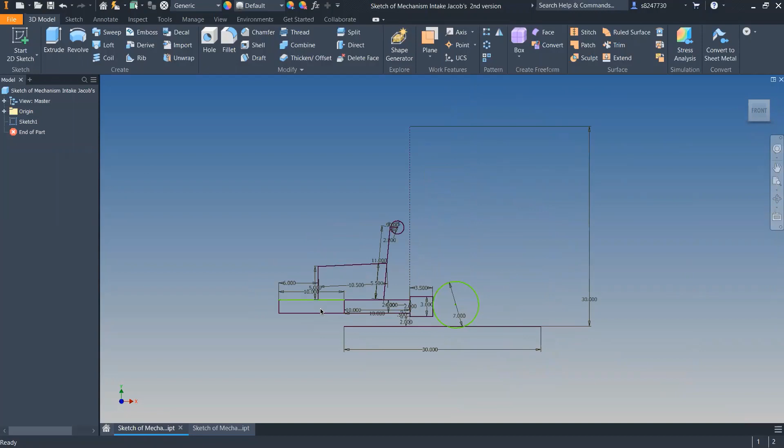So the thing that we left off on was we were creating a sketch that models the intake, and Jacob edited the sketch that he made. So I'm going to show you the one that he made for the last YouTube video, and also the one that he made yesterday, so that you can copy that one. Sorry, Autodesk is kind of slow. This is the one from the last video, and this is the one that he made yesterday.

And the difference is that instead of having this piece be the piston, so that this can move down and up like that, instead this piece right here is the piston. So when it extends, this basically will move down. So I'm going to let you copy this, and then we'll see how the ball works in this system and constrain some stuff.

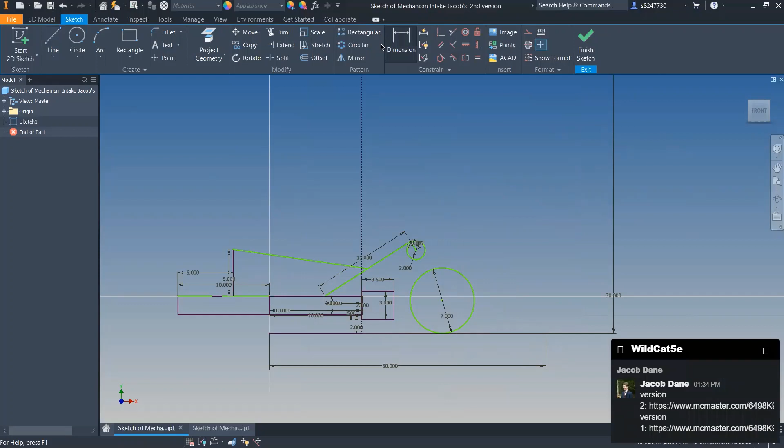So basically, this line represents the ground. As the ball comes this way, it's stopped right here. It's picked up by this wheel, because this piston will be fully extended. Then the ball will be constrained to this face, and it will also be constrained to that. So as it moves up, it will slowly come into the robot like that, under the intake, and then it'll be inverted.

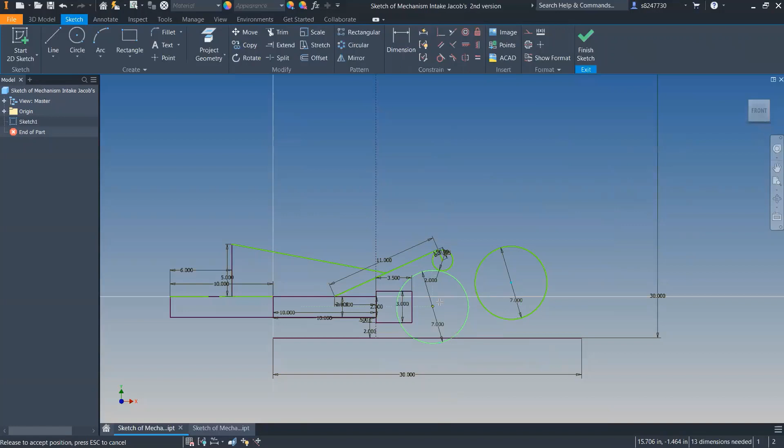You don't have to do that, but that's showing what's going to happen. And this is just a piece of frame, and so is this. So this will move in and out like that. So what we have to do is find a piston on McMaster-Carr that can do this. Jacob, you already found the piston, right? Yeah, that's what I sent to you. Let's see. Okay.

Just mention which of the versions you're using. Yeah, we're going to use version 2. So download that. We're running version 1 right now, so all we're doing is this sketch right here. Oh, and when it's all the way up, it will be inside frame 2.

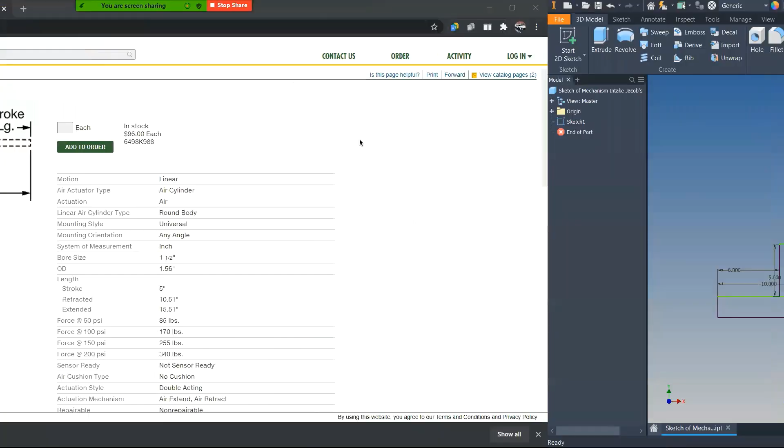So first thing we're going to do is open that thing we just downloaded. You can type in this link in McMaster-Carr, and then it'll give you this again. So try to open it from downloads, like we usually do. Be sure to click all files. I'm saving all of the files in CAD class intake.

All right, so this is good, except that, wait, let me show something. Double acting. So I have a question about this, Jacob. Don't we want it to be usually in, so that when the game starts, it's automatically in? Yeah. This is a double acting piston. Wait, but

Double acting just means that, well, single acting means only one direction. Pushing out is a force, and retracting is just taking the air pressure out. But with double acting, when it's retracting, instead of just taking the air pressure out, it also uses force to retract it. So it basically puts a force in both directions. Okay, I think I remember that.

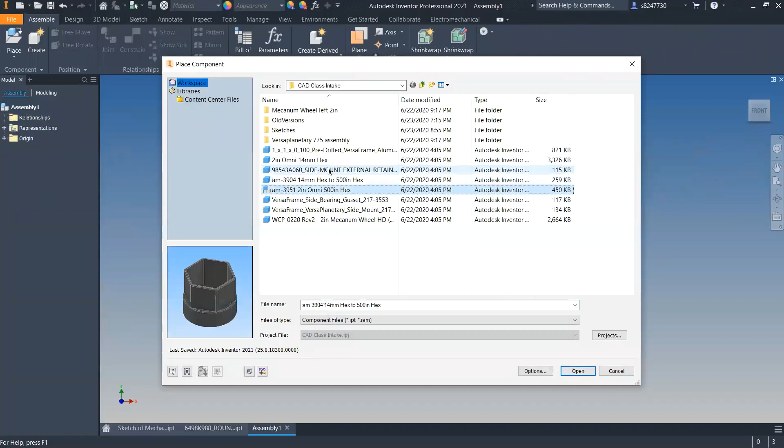That makes sense. So we want this piston to be able to move in and out in our animation. So what we're going to do is actually make an assembly, and then basically animate this piston. Sorry, I pressed saving.

All right, here we go. So we're going to ground, we're going to get 2 of these and then ground this one. Actually, only 2 of them. So now what we're going to do is go back to our files and click on this and copy and paste it.

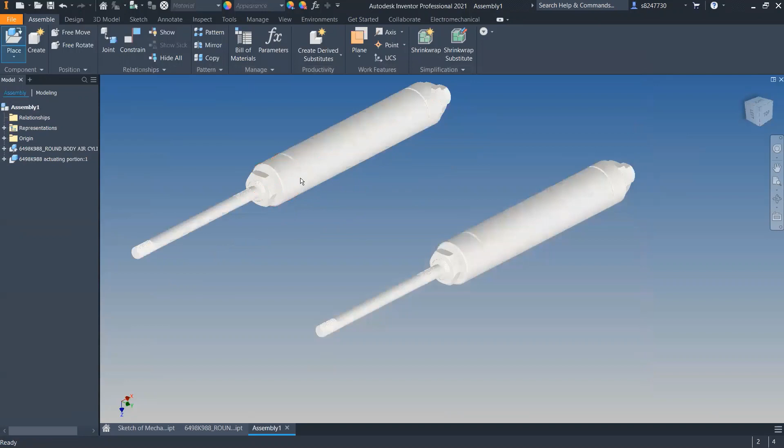We want this to be the, you can keep that product name so we don't get confused, but we want this to be the actuating portion of the piston. So now what we can do is place the actuating portion of the piston here. We're going to open it and then delete that. And all we want is the actuating portion.

Let's see. All right, there we go. Save that. So now what we're going to do is go into this one and then delete everything except for the actuating portion. Sorry, that happens. Basically just like that.

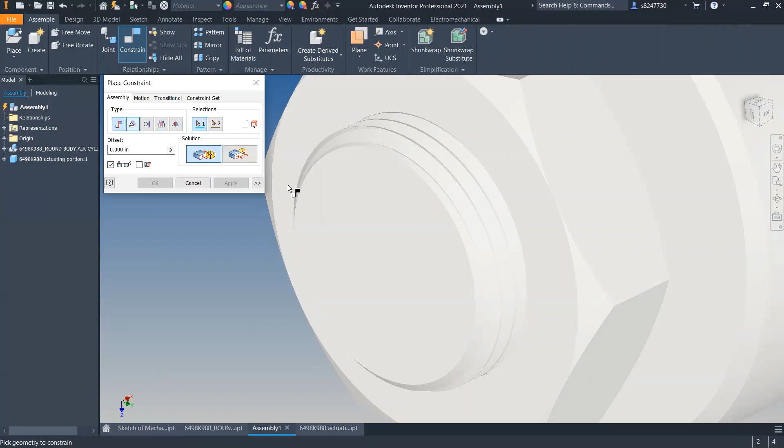Okay. And then what we can do is do a maximum minimum constraint. But first what we're going to do is do that to this. And then, so now this is going like that. So now what we can do is constrain this, and we want the maximum to be -5, and minimum to be 0. I make the minimum -5 and the maximum 0.

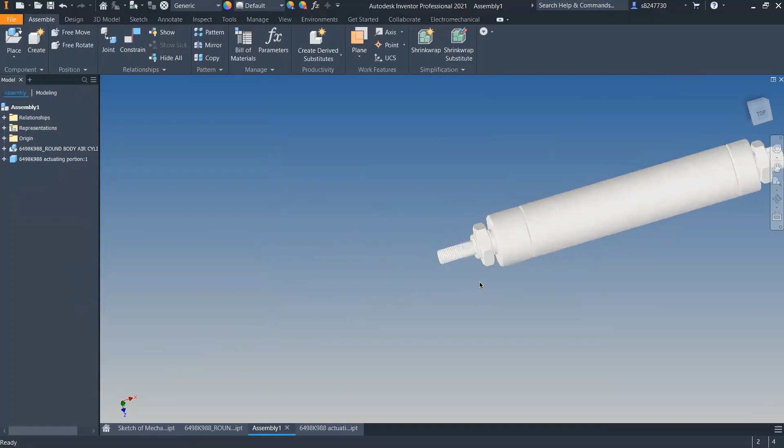There we go. So now it goes in and out like a normal piston, and I have a little animation that we can use in our actual. So this is going to be the piston. All right. So next thing we can do is start using the sketch to make the 3D orientation of this. So we're going to need some VersaFrame.

So we can go in here, and instead of having to download it again from the internet, we've already downloaded it. So what we can do is just copy this, paste this, and we can just rename this because it hasn't been put in assembly. If it was inside of an assembly, we wouldn't be allowed to rename it because the assembly would be looking for a file of that name in a folder. So you have to keep the instance of that file, but you can copy and paste it if it's in the assembly.

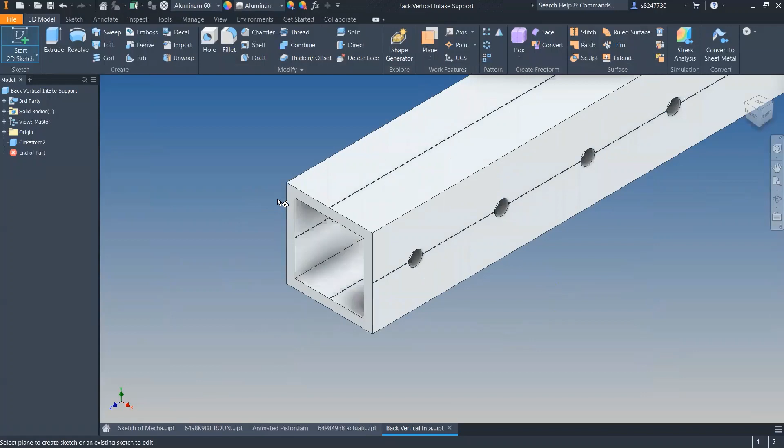So this is going to be the back intake support, vertical intake support, and we're going to have to make this piece of VersaFrame 5 inches long. So what we're going to do is start a sketch on this end, project the geometry, and then extrude it. I'm going to do a cut extrude. That's weird. Oh, sorry, I did that way too fast.

So the problem I'm having is that for some reason it's telling me to do it in millimeters. But I know that this piece is 59 inches long. So what I'm going to do is convert the document. You can go to document settings, units, length inches, apply. That way, Autodesk automatically converts the length of this from millimeters to inches. So if you measure it, it's still 59 inches long, but all of the units are in inches now because we just converted it to inches.

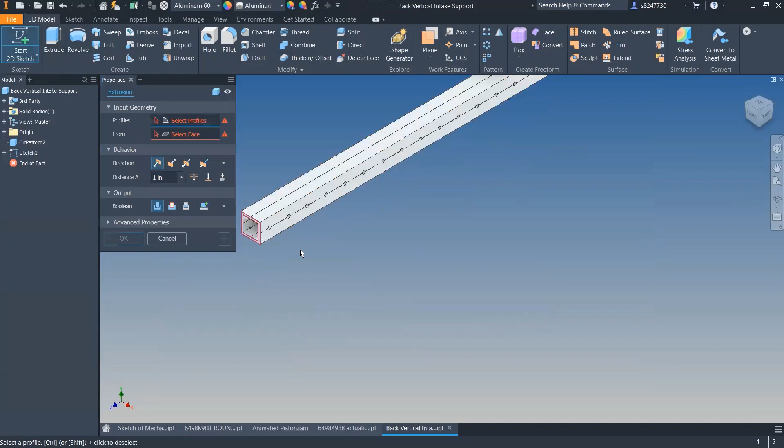So I can now extrude this 59 minus 5. Alright, there we go. Now we have our tiny piece of VersaFrame. Next thing we want to do is go ahead and close all these out, and go back to the sketch. Next thing we're going to need is an 11-inch piece of VersaFrame. So all we have to do is go to our previous piece of VersaFrame, this one, and then click.

And then we can call this the moving intake support, because this will be moved by the piston. And we want this to be 11 inches long. So all we have to do is click here.

And that's the good thing about doing the subtraction problem. I did 59 minus 5, so basically I'm putting the length that I want right here. So all I have to do is take 11 and it becomes 11 inches. That way you don't have to deal with parameters, which is something that you can look into if you want, but it makes it a little easier for us. So this base piece of VersaFrame right here is the drivetrain. So that's already done.

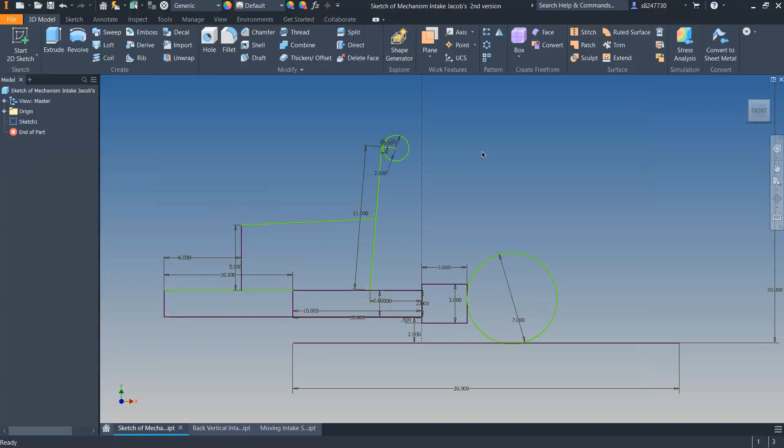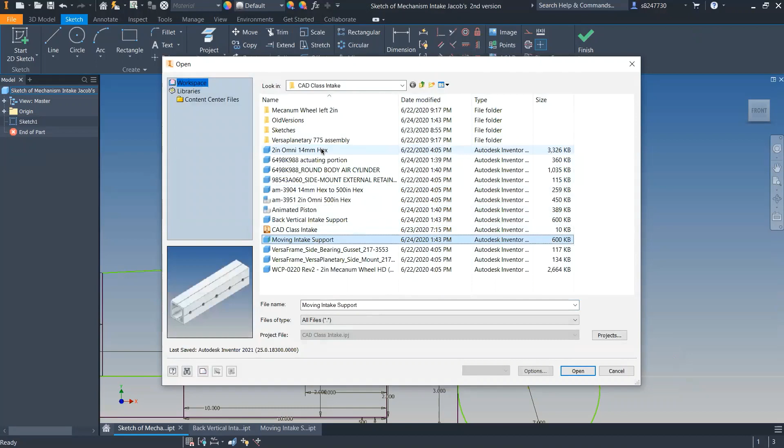And something that I realized just now is that this drawing is not really accurate. So what we're going to have to do is change this. You already know that this is 90 degrees, so we can do a parallel constraint. But we're going to have to open the little bracket that we're using to see the other offset, so that we have the right one. So this sketch, this 1.125, represents the distance from here to here.

That's good. Wrong information. 1.625. So we have to change that one too. This is the dimensions from the middle holes to that hole. Well, wait. Oh, because in your sketch, this line is the middle holes. Because it's at the bottom. That's where it would be mounted, I guess. Okay. Alright, so never mind. I was wrong. So Jacob's sketch was correct on that one.

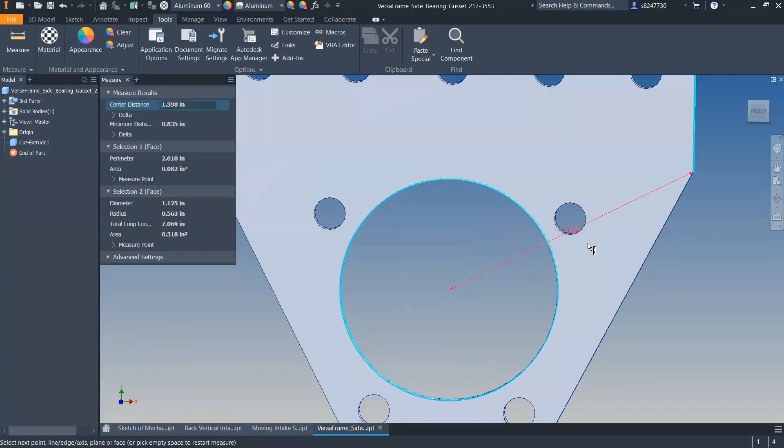On this one, we want to do 1.25. Right now, it's just measuring this distance, but we don't want that. We want the x distance. So what you can do is click delta... no, these are the Cartesian coordinates. So this is the x distance. You can see it's 1.25 along the horizontal plane. You can see that it's x because down here you have your little Cartesian plane indicator, which is x, y, and z. So this is the x-axis, 1.25.

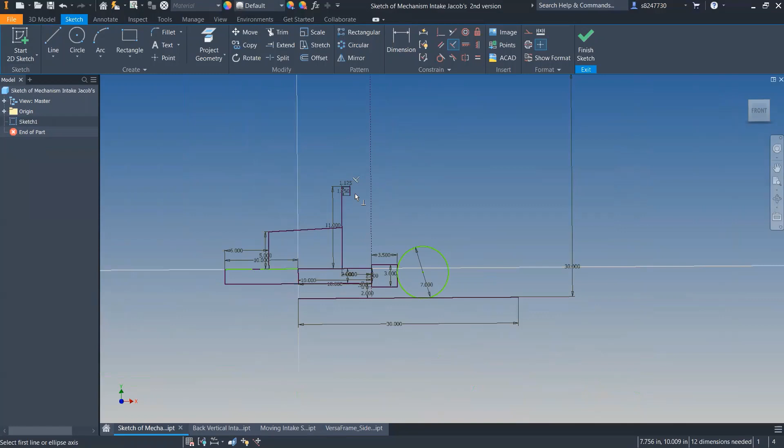Next thing, we basically just gotta put this 1.25. And instead of making this a 90-degree angle, right now we don't have an insane amount of dimensions, but if you did, you want to just use a parallel constraint. Okay, that was good. You would want to use a parallel constraint because that way people could look at your drawings easier.

I don't know why this is breaking. Okay. And this is just the same 2-inch circle. Maybe, okay. I don't know. That's weird. Anyways, so it's still 11 inches. That offset is correct. And now we have all of our Versa frame pieces. Now what we can do is start putting them all in an assembly.

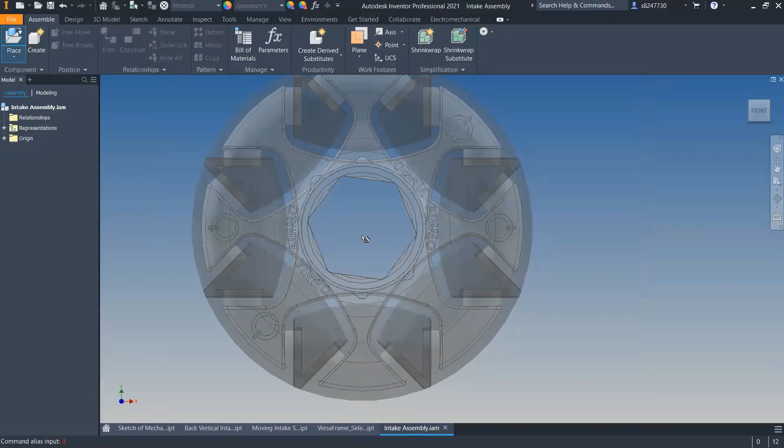Jonathan. Yeah. So I think in the sketch file when you added the offset downward, because you made the offset downward, we have to extend the overall 11-inch piece of Versa frame so that where the wheel is stays the same. So I think it has to be 12.25 inches now because you did 1.25 down, so that where the wheel was before is the same. Yeah, that makes sense. Okay. All right, cool. Thanks.

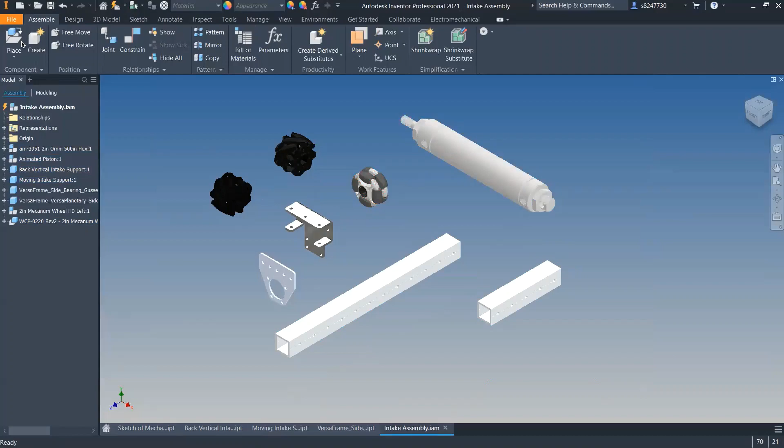All right. Next thing we're going to need to do, so we have our left mecanum wheel, but we're also going to have to put in our right mecanum, which, Jacob, did you get that? Oh, yes. That was that weird one where they were different colors. We can just change that in the assembly to make them black. Is that way? Not a good fancy black. The next thing is, let's see, the versaplanetary motor so that we can spin this.

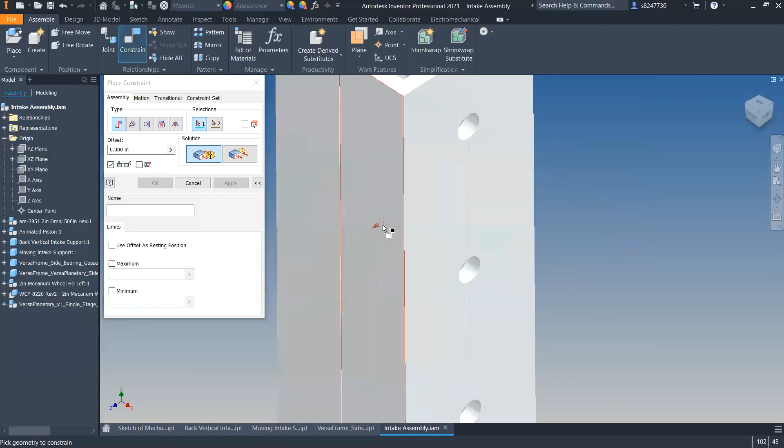So what we're going to do first is kind of orient. We're going to base everything off of this piece, which if you go back to the sketch, is this one right here. So basically, we're going to constrain this piece. Don't worry, we're going to ground something, but we also have to constrain it like that. And we actually wanted to go to this point so we can use 80-20 L brackets, which we will do in a second. We also want to constrain it to this plane. Now it can move like that, so we have to constrain it to this plane.

Now this piece is essentially grounded, but to make it so that people understand what your assembly is based off, you just want to go ahead and ground it. The reason I did that is so that if we make all these planes visible, it's oriented in these planes rather than somewhere off kind of crazy. All right. So next thing we're going to want to do is copy this, and we have to make sure that these are flush with each other in that way, and we want them to be flush in this way.

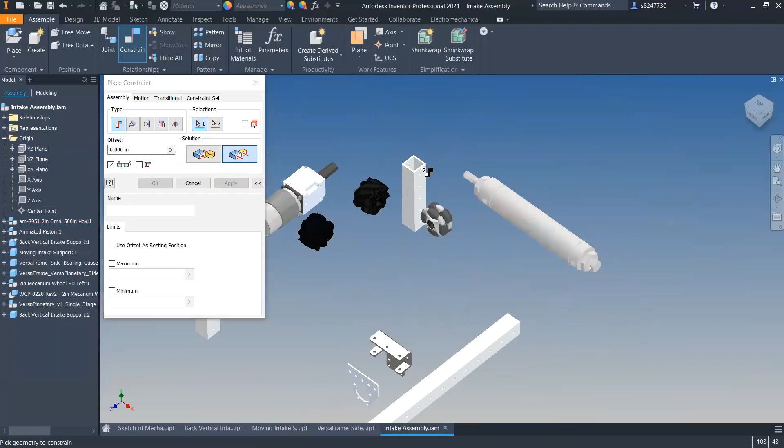Okay. So now we have to figure out the distance between the two. Luckily, we have our entire robot on CAD, so we can just reference it. But if you didn't, you would just estimate the distance, and then once the whole robot comes together, you might have to change it. So this will take a while. It's a whole robot.

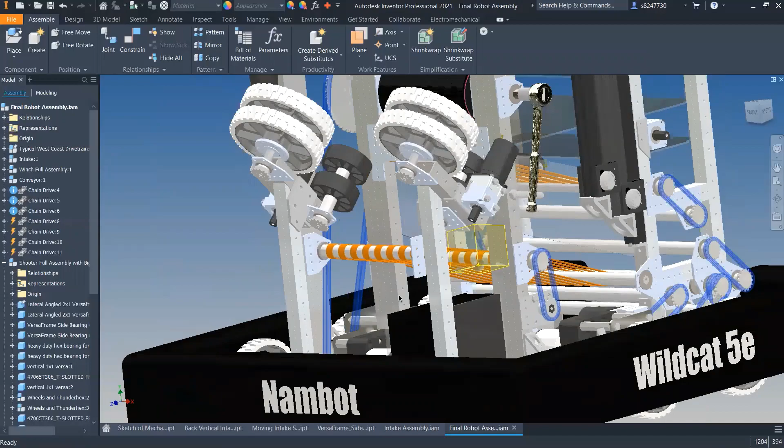Okay. So what we're doing is replacing the intake assembly, which is this one right here. So what we have to measure is the distance between this bar and this bar, which is 15 inches. So I'll move this over here. So basically that means we have to constrain this and this and make it 15. There we go. So now this piece is constrained in this plane.

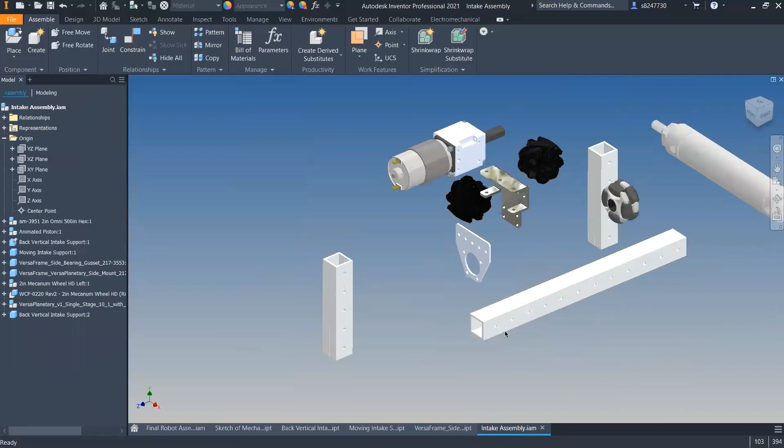Next thing we got to do is place our next piece of VersaFrame, which is this one right here. Just 10 inches long. But this one has to be able to rotate on an axis. So we're going to have to do something interesting here, which is going to be putting a shoulder bolt into the first frame. Sorry, this is kind of hard to explain.

So I'll make this assembly invisible. So don't mind these chains. Basically what we're doing is putting a bolt through right here so that our VersaFrame can rotate back and forth. And that way, once this piston actuates forward, this piece rotates on this axis. So to do that, we're going to use an 18-8 shoulder screw.

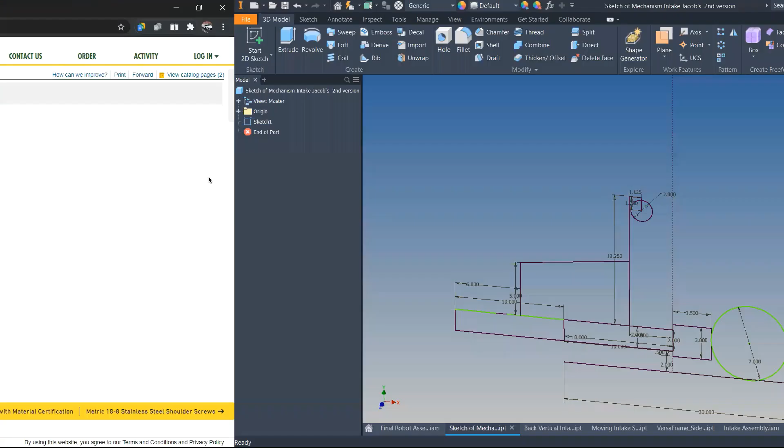So basically, what you have to remember when you're picking this out is, we'll just pick this piece of VersaFrame for example. It's a 1x1 VersaFrame. So you definitely want to have these walls in there. So the shoulder bolt has to be smaller than 0.8 inches. You also want it to be larger than about, let's say, 0.25 inches, because there could be a considerable amount of force on this bolt.

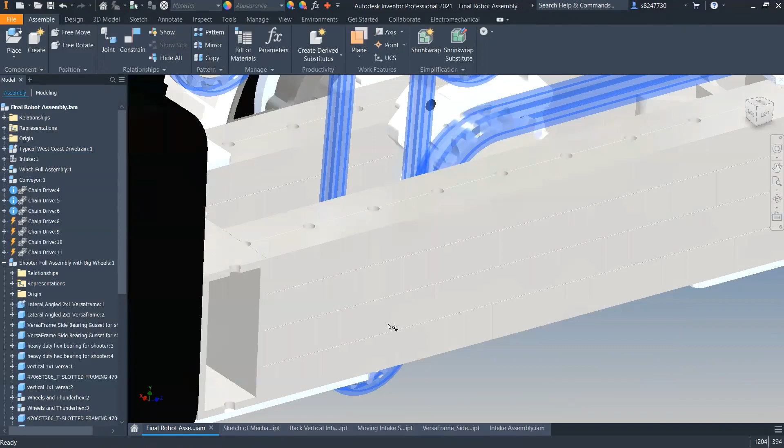Because your intake is obviously going to be hanging out of your robot. What other teams like to do is accidentally come and crash into the side of your intake, which will basically mean there's going to be a ton of force on this bolt right here, pushing it the other way, and on the piston, which is very rude. So to counteract that, we got massive shoulder bolts.

So what I'm looking at right here is the shoulder diameter. I said that I wanted it to be in between 0.8 and 0.25. So I'm going to make it a half-inch shoulder bolt, which, if you think about it, is a pretty big bolt. That's not going to break anything. This is kind of in place of a bushing or a bearing, because we don't need those things because this shoulder acts as its own bushing.

So what we can do is get a 2-inch shoulder bolt. This is the shoulder length. Go over here and save it. The next thing we're going to need is going to be a 3/8-16 lock nut, because it looks better if you have a bolt with a nut. That's how you should CAD, especially things like this.

You'd be tempted to buy a high-strength nylon insert lock nut because it sounds cool, but you should actually go ahead and buy either a medium strength or a low strength, because we only use our robots for a few hours in total. It's not like a super long robot that you've used for years and years. Just buying a low strength steel lock nut is fine, and they're never going to break for what we're doing.

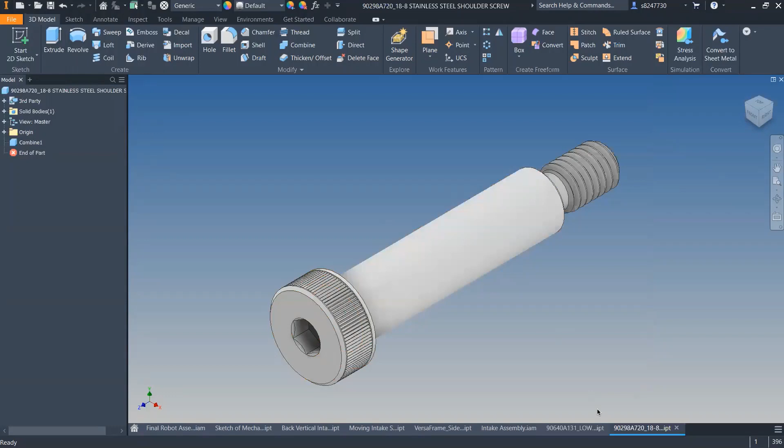Right. So save that, and save as. Oh, that's right. My computer's automatically set up to a project file, so it's saved automatically, but you will have to save it to the folder that you're saving. So basically, we can go back in here, and we want to open. We have our huge shoulder bolt and our nylon screw, nylon lock nut.

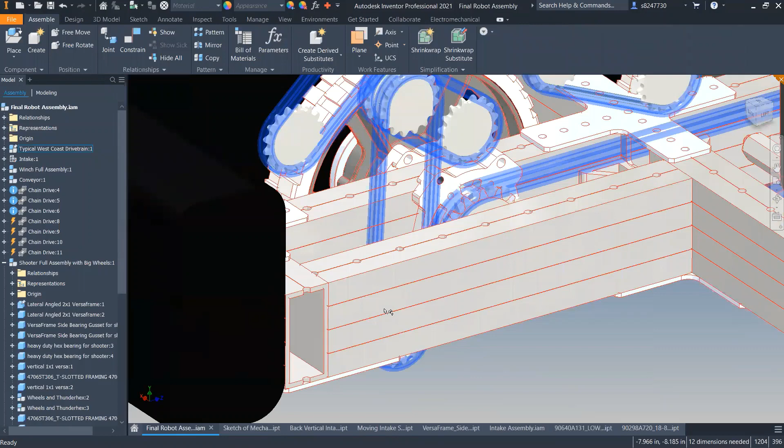Okay. So now what we can do is go back to here, and we know that this piece is actually not going to be that long. We have to extend it yet again, because this piece has to stick below this, because in your robot, you want the shoulder bolt to be in the middle of this piece of VersaFrame, so it has strength on both sides. So for that, we're going to need to extend it an inch. So instead of 12.25, it would be 13.25.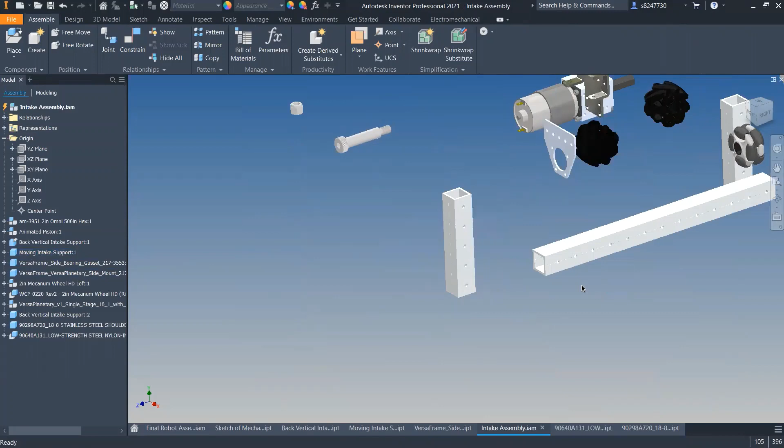So here we go. Next thing we're going to do is go back to our assembly and start constraining this. We want this face to be constrained to this face, so you don't have to drill a new hole. You can just use one of these existing holes and widen it out.

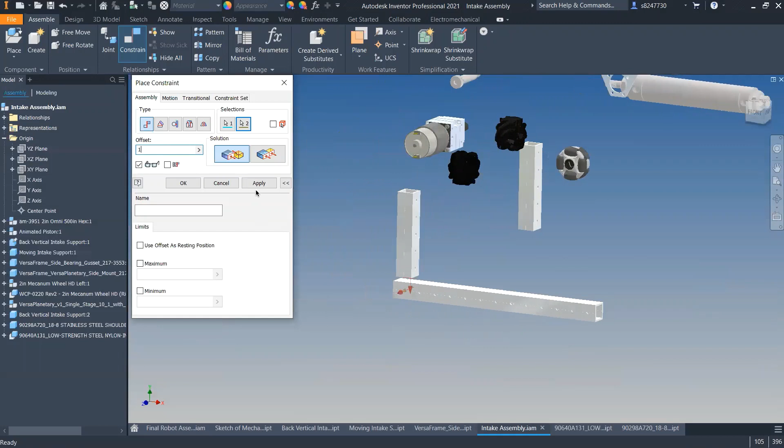So next thing we're going to want to do is do some fancy constraining. The thing that we care about is this hole, because we're going to use that for a bolt. So if we go from here to here, we know that there's a 2-inch piece of VersaFrame below this on the drivetrain. So right now, it's taking the center of this hole to this face. So we want it to be an offset of 1 inch. That way, it'll be able to go like that.

Next thing we have to do is constrain this to this. Okay. So basically, we want to have this rotating like that. And for this, I think we're going to use an axis that should align with our sketch. An axis is basically the exact same thing as a plane, except it just goes through a hole. So our axis is right there.

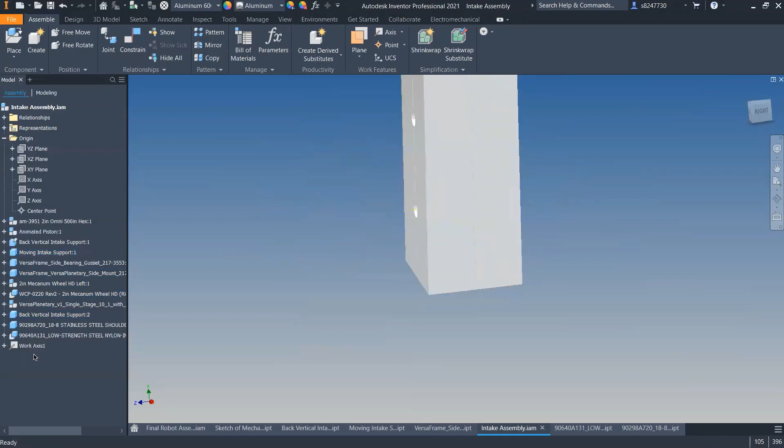So if you want to make it longer, you just have to very carefully click on this dot. It's very hard. Okay, does not want to go. So what we're going to do is go back over here. We know that if we go into this sketch and extend this line 1 inch, and make this line parallel to this line, make this angular dimension 1 inch. Note that this is basically the center of the hole.

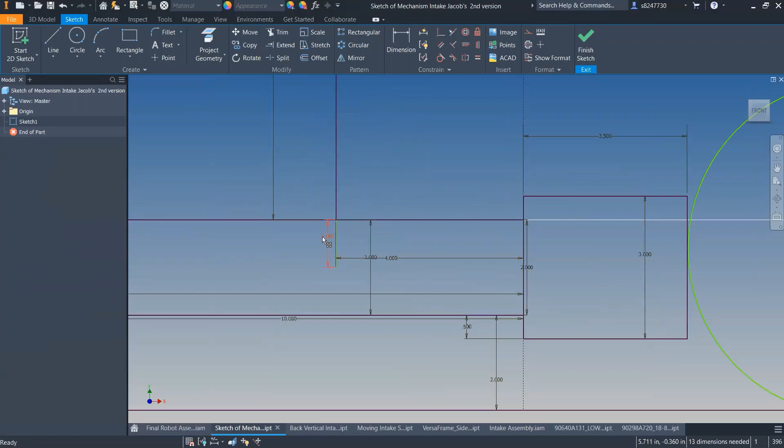So if we have our axis right here, we also want to have a constraint right here. So that would mean that the dimension from here to here would be the same 10. What I'm trying to do here is make our object be able to rotate on an axis and basically do a cool animation so that when we're presenting this, we have a way to show people what's actually happening.

So this piece right here is represented by the middle of this. So we have a 10, it'd be 10 minus 0.5, so it'd be 9.5. So from this face to this axis would be 9.5. Okay. So basically now it rotates like this. Sorry for all the math.

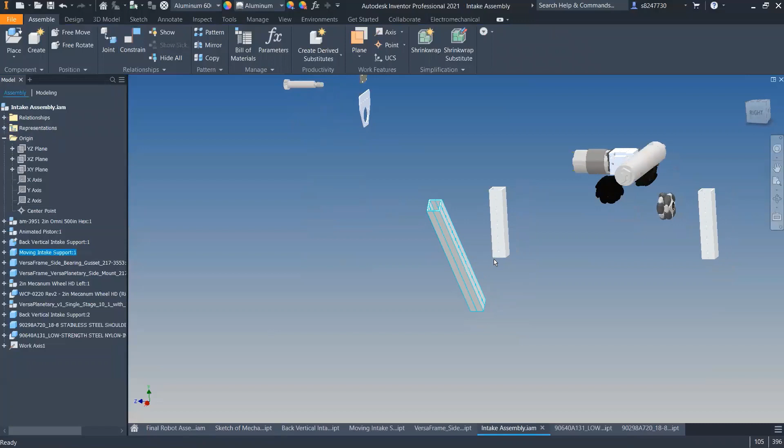Next, we're gonna do the exact same thing over here, and we're gonna have to create another axis on that one, and constrain this face to this face. Next, we're going to constrain this axis to this face, and offset at 9.5. And then come up here, and do another constraint of, let's see. So which plane is this not constrained in?

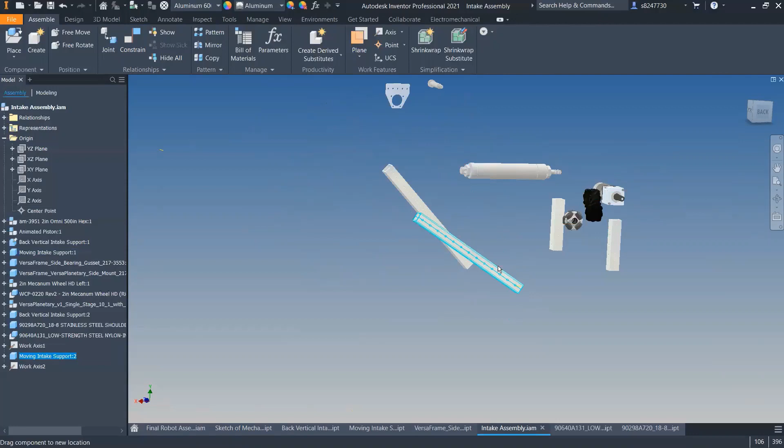Looks like this one. Okay, so for this one, you can look back at your constraints by clicking the plus. So I did a mate there. That's correct. I did an offset of that down 1 inch. So from this face to this is an offset of 1 inch. Alright, now our pieces should rotate.

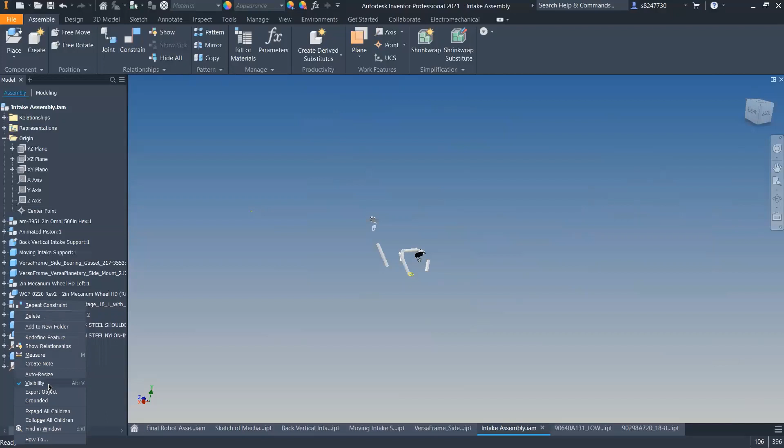Well, we actually want them to rotate together. So what we're going to do is click this and click this, make them rotate together. There we go. So the next thing we're going to do is bring this crazy axis over here. And since we don't really need our axes anymore, we can just make them invisible. All right. So the thing about this is that you don't want to have this piece dependent on your bolt.

Because what happens if you change your bolt or your bolt size, you're going to have to end up redoing all of the constraints. So you want to have them based on the axis instead. So what we're going to do next is put our bolt in. Right there. And copy and paste.

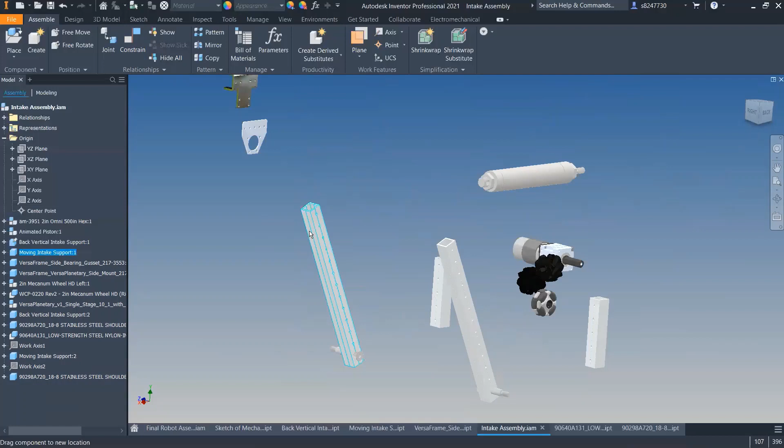And in the real world, you would make these holes larger to fit the 0.5 inch shoulder. But in FRC, you don't have time to do that because if you change the bolt size, you don't want to also have to change the size of the hole and deal with all of that stuff.

So the next thing we're going to do is find our weld line. And a good way to do that is to just highlight over where you think it is. See it. So we need 2 of these. So then we don't want them to rotate. So if they do, Autodesk will have to think about whether they should rotate them.

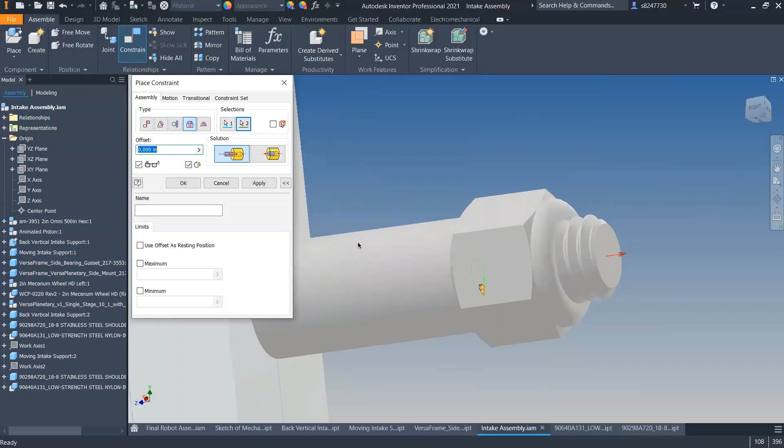So basically all we're going to have to do is just put it on this. And it looks like it'll just be floating there, but actually there'll be another piece of VersaFrame right there, which, once we put this in the full robot assembly, we'll be able to see. And there we go. All right, so now we have it rotating like that. So the next thing we're going to do is put these in.

So if you were going really cheap, what you could do is just put one on each side and only have 2 of these. But since these are like $2, we're going to have 4 of them so they're strong. Because this is the only piece on our robot that's ever going to be outside frame perimeter. So we want it to be one of the strongest pieces on the robot. So we don't want to go cheap on this.

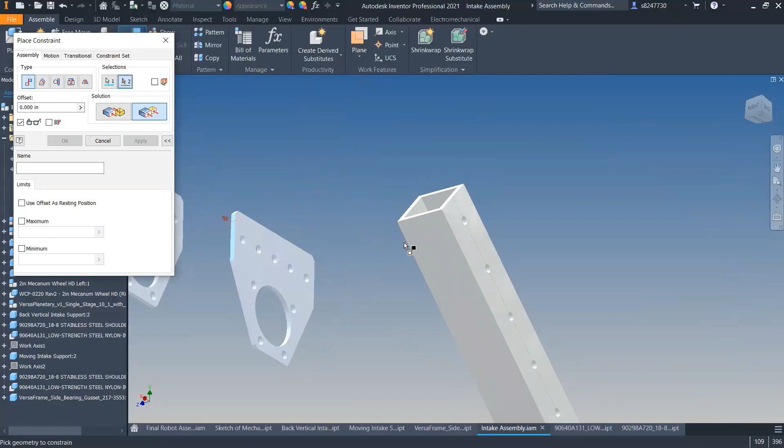So that face will be flush with that one. And basically just putting this on like that. And this will be able to house bearings, which we're going to put into our assembly next. So there we go. All right.

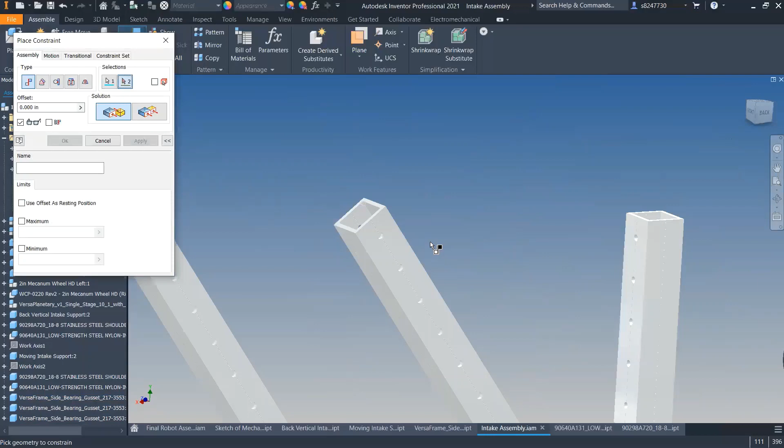All right. So now when you move this up and down, this moves with it, which means that it's fully constrained. So we're gonna copy and paste 2 more of these, because we want 2 more, and then we're gonna do the exact same thing on the other side.

Now you could technically mirror this entire assembly, but that is not a good practice. Because when you mirror something, it saves another copy of it in your folder. So if I mirror my entire assembly, I would have all of these files, and then after it, it would say MIR space 1.

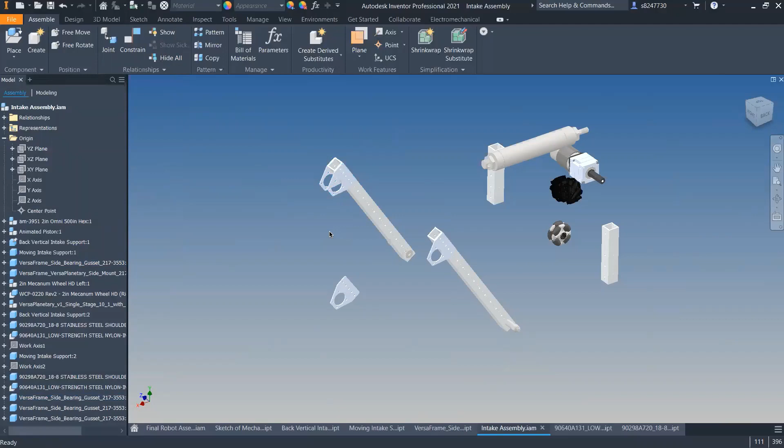So what happens if you want to edit your design and you want to edit only one side of it and put some more components in? Then you have to delete all of the mirrored files and then mirror everything again, which is a huge pain, and you don't want to have to keep doing this.

In the real world, you could probably mirror something like this because you probably wouldn't edit the CAD like 20 different times. But in FRC, we edit CAD a lot because CAD is kind of like a cheap way to prototype stuff on our team. So there we go. Now we have this piece. Next thing we're going to do is just move all this stuff out of the way.

We're going to do the roller bar next. So to attach the roller bar to these pieces, what we're going to need are some bearings. So we already have the bearings downloaded, but I'm going to show you how to download them again. So we're going to go get these from AndyMark. And we're going to need a 0.5 for here.

So the thing that's important about these is the bore. And the bore is basically the center. So like this one right here, 8mm round ID, means that the middle of this is 8mm wide. This 1/2" hex ID means that this has a 1/2" hex on the inside, which is what we want. So you can click on this and download it.

Oh, a thing about AndyMark: most of their CAD files are placed right here on the product page, but some of their CAD files are placed on this massive database of STEP files, which is an absolute pain to look through. See, there's every single file they have. So at some point you'll have to look through that, but that's how you get files if they aren't placed on there. So the next thing we're going to do is actually open our hex bearing. And we want to put it in GrabCAD 2020 class 17.

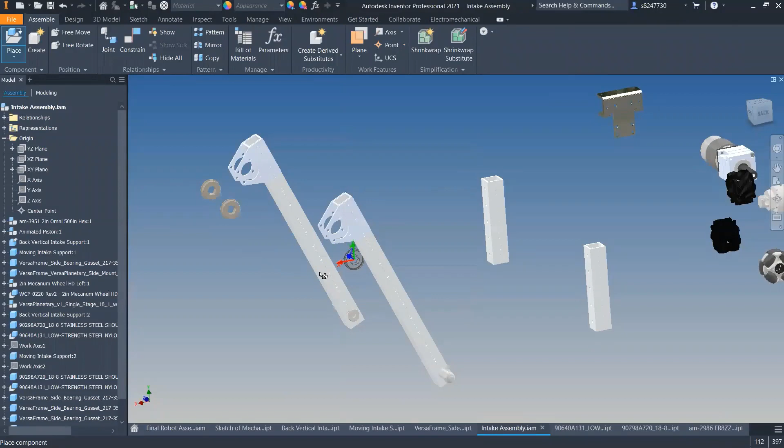And for this, we're going to use the same insert with a lock constraint. We're going to insert it on this flange, this face, and that flange. And so here to there. All right. And we're going to do the same thing.

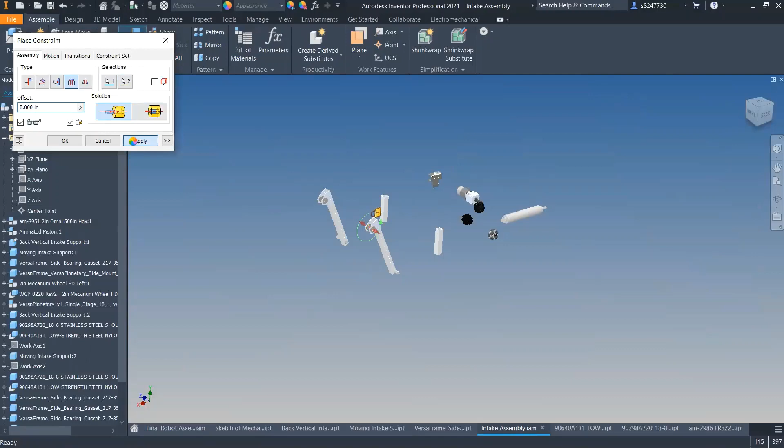And if you had a lot of time, what you could do is orient these so that all of their pieces are the same direction. But we don't really need to do that. It's going to waste your time. So we're going to save it because we have a lot of stuff in here.

Next thing we're going to do is map out our Thunder Hex. So our Thunder Hex needs to go almost to our front bumper. So make these bumpers invisible and measure, I'm pretty sure it's like 28 inches. Yeah. So we want our Thunder Hex to be 27 inches long to be safe. So what we're going to do is download some Thunder Hex. In our previous assembly we already downloaded it, but we're going to do it again.

So we use half inch because it's stronger than 3/8. But you can basically get an 18 inch or 36 inch. So this says it's out of stock, but it'll go back in stock in 2021 in the next season. So an important thing about buying this: it always goes out of stock. I don't know what the problem is, but they can never make enough of it. So it's really good to stock up on this in the off season if you have enough money to buy some. So we want a half inch hex, 36.

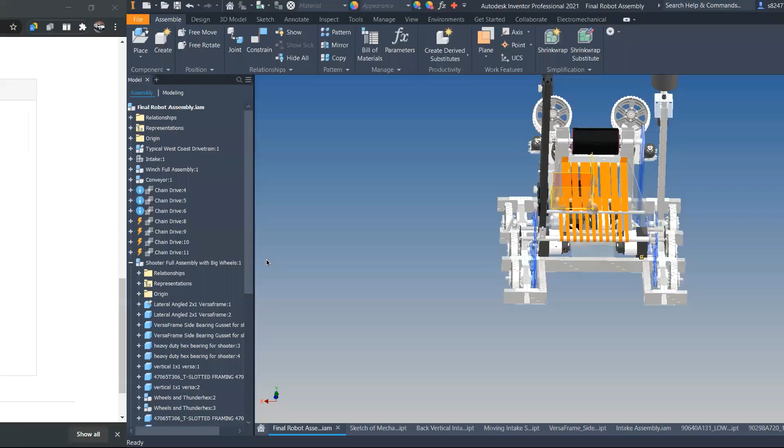We'll download that. Go back over here, open it, and then put it in the same folder that we had. So previously we haven't really been naming our files because they're really specific, like pistons and stuff like that. With this, before we put it in the assembly, we can name it Thunder Hex because everybody knows what that is, instead of having this ridiculous name.

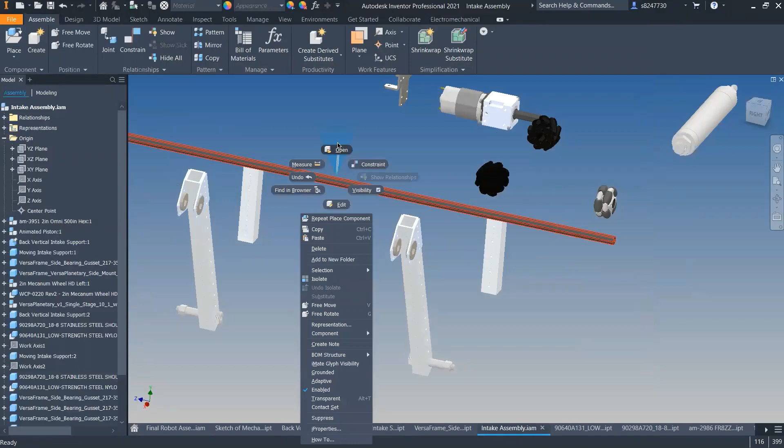Alright, so place this in there, and we want to go into this file, and we know that it's 36 inches long. We start a sketch there and project the geometry, and then extrude it. 36 minus 9. And there we go. Now we have a 27-inch piece of hex. And if you don't trust this subtraction, you can just measure it.

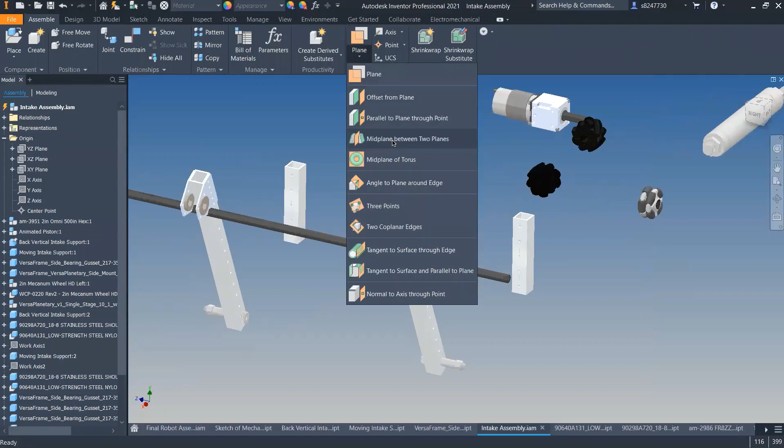Next thing you're going to do is use a plane to put this in here. So you can create planes in part files like that, or you can create them in assembly files. And you want a mid-plane between right here and right here. This will save us having to measure. So the next thing we're going to do is create a mid-plane between this plane and this plane.

And since planes can be kind of annoying, what if you have an assembly with like 50 planes? Like if you go into our final robot assembly, and if I turn on all the planes, there's like a million. So a shortcut, instead of having to make every single one invisible, is you just click View, Object Visibility, and then All Work Features, and that makes everything invisible at the same time, which is convenient.

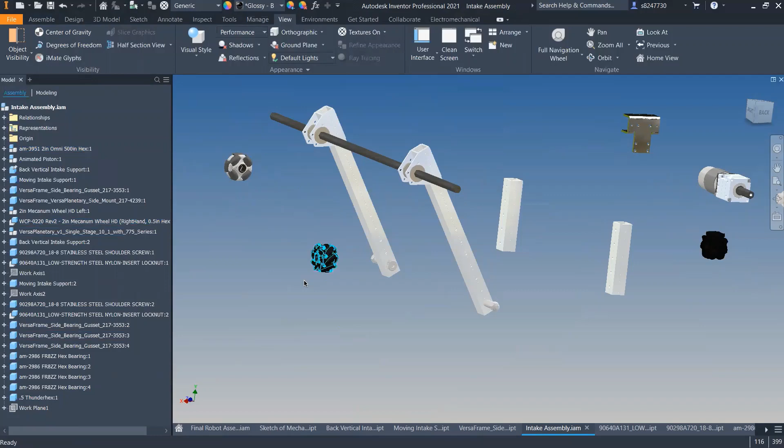Alright, so next thing we're going to do is put on these wheels right here. So we have to be careful about orientation. So this is a right-hand wheel. So when this is spinning, it will push the ball to the left. This is kind of complicated. And since this is kind of hard to see, what you can do in View also is you can click Shaded with Edges. Now you can see all the edges, which is kind of helpful.

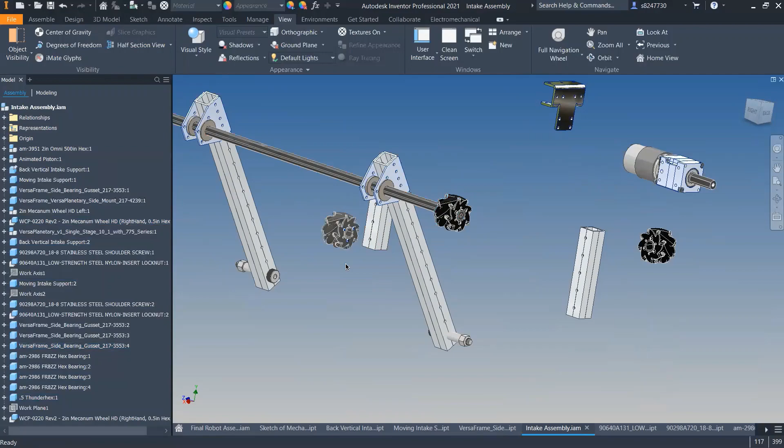So we're going to put this wheel on the very outside right here. And then constrain it to that one too. Now it can move like that. So what we're going to do next is put this right here. So now when you move this back and forth like that, it'll go in. So we're going to put one more of these wheels right there. Same thing.

And something that we have to be careful about is whether the ball will hit this piece right here. Because in real life, in CAD, you can just keep it there if it's going to hit it anyways, because you can just tell your build team, hey, you're just going to use the bandsaw on this and cut it down. So we want this wheel to be, let's say, maybe a 3-inch offset.

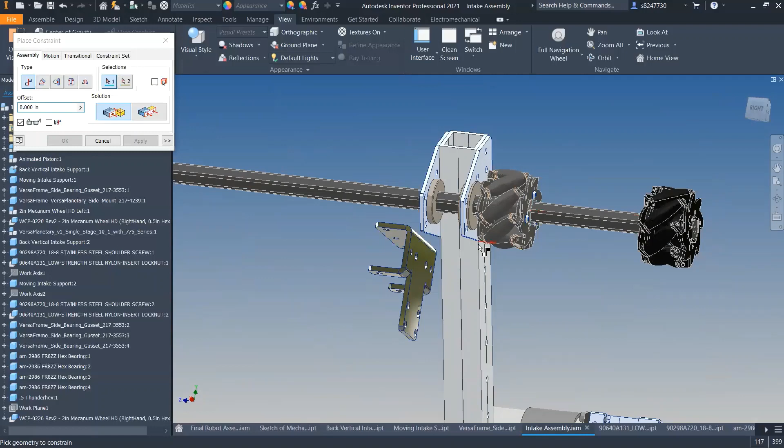Well, yeah, sounds good. And when you're actually testing this, it'd be very good to move this around and see what happens. But as I was saying with the offset, I'm going to make this invisible so you can see. If a ball runs into this, it will touch this wheel and not this bracket, which is exactly what we want. In CAD it looks pretty good, but you can see that it's a little tight. So if you wanted to in the build season, you could trim or cut this out with a saw to make it work better. But we don't need to do that in CAD.

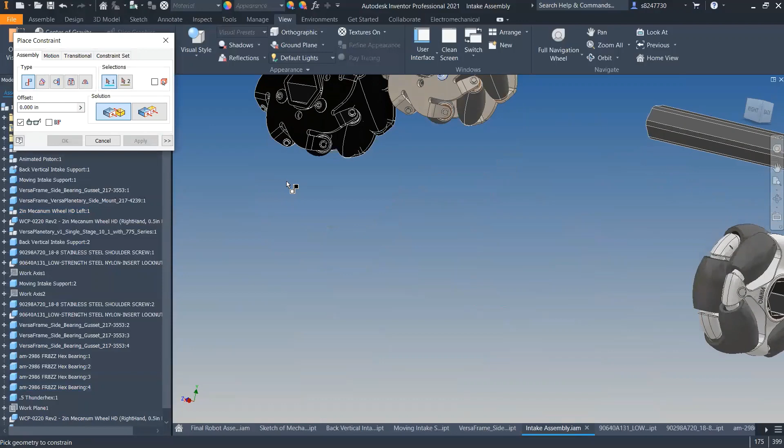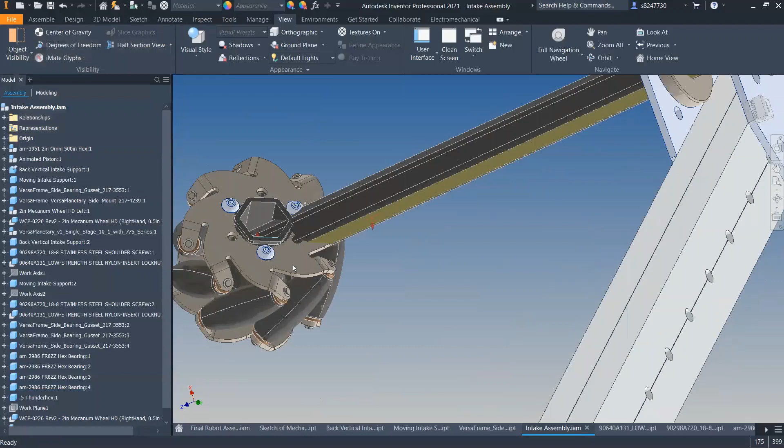So the next thing we're going to do is get our left wheel and put one of those. And this is going to be in the opposite orientation of our right wheel. So I'll put this one first. These are pointing towards the center, so we want these to also point towards the center. On this. Okay. To make it easier on myself, I'll just do this constraint first. Now I can see which faces go to which faces. There we go. All right, we got our first wheel, and this is just a copy of it, so we can put it in.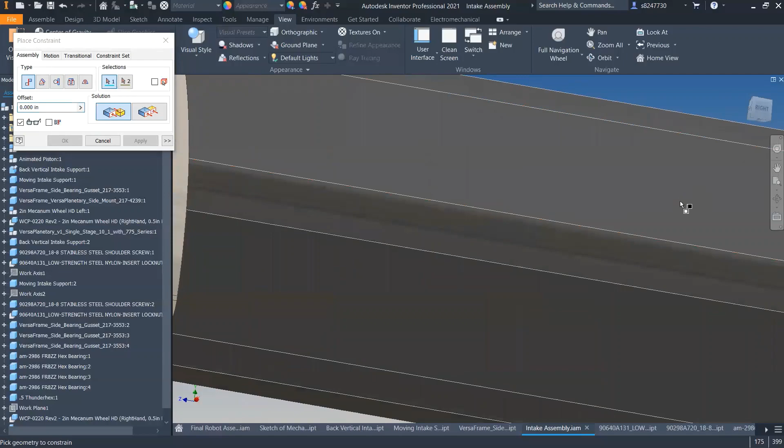All right, so let's face the right way. We're 3-inch offset, and put this in. And in the build season, when you're actually ordering stuff like these wheels, stuff goes out of stock really fast. So you want to make sure to maybe order 3 right-hand wheels and 3 left-hand, just in case you want to put another one right here, if it turns out that's good.

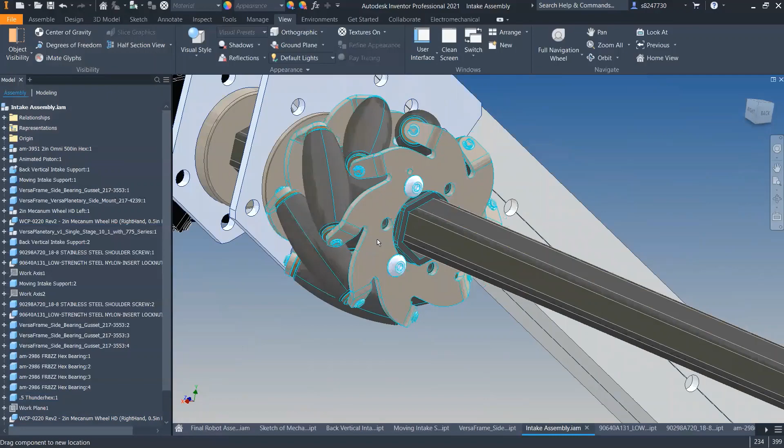But since this season has already passed, we kind of already know what's going to happen, and that this design actually does work. So I'm going to put another one in here, a little bit closer, because you need a few of these pushing the ball towards the center, because that's really important this season, because the balls like to stick on everything. So I'm going to constrain this wheel to a 3-inch offset to this wheel.

And I'm just going to kind of act like this bar isn't even there, because that's how the ball will think of it. It's not going to touch this, it shouldn't touch this bracket. So it'll think 3-inch, 3-inch, 3-inch. And that way, it'll be very consistent across the board. So we can do that there. And then we also want to do the same 3-inch offset right here.

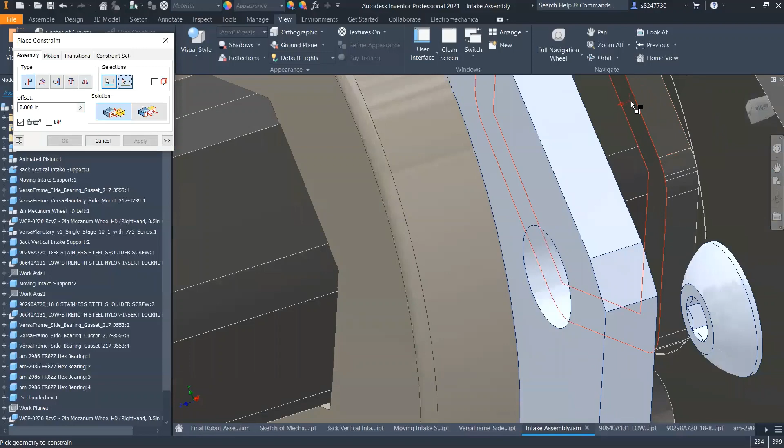Forgot to type 3. So a shortcut you can do is go right here, and then if you just click on Mate 33, this little thing pops up, and it says offset D54, which is dimension D54, and then you just type 3. That way you don't have to delete the constraint and waste your time doing it. So here we go, and you want to go to that face. All right, cool. So now we have our 6 mecanum wheels. So next thing we're going to do is make all these black. That looks cool.

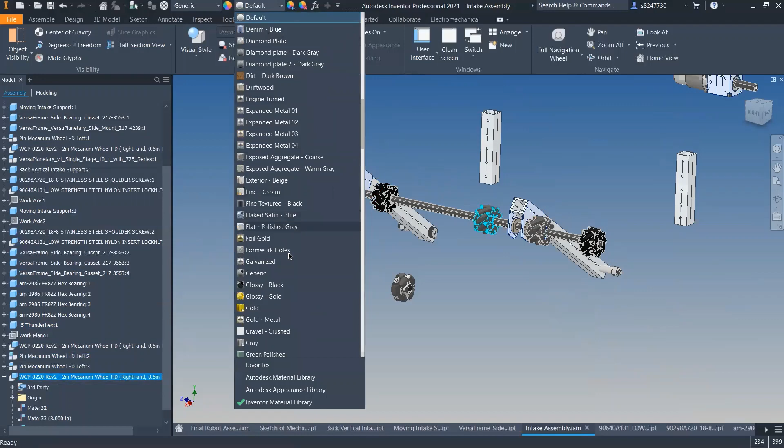So this won't actually change the color in the actual part file, but it will just change it into a single file, which is good. So we don't have a bunch of crazy colored wheels. So the next thing we're going to do is put a bunch of these omni wheels. So basically the ball will be directed towards the center and be pushed in with these.

So there's, let me go to this for a second. So if you go to, and then let's say, there are different durometers of wheels. And the durometer is basically just how squishy it is. So the darker durometers, like the gray and the black, are harder than the green ones. So what we want to do is put a green one in the very center so that it works better.

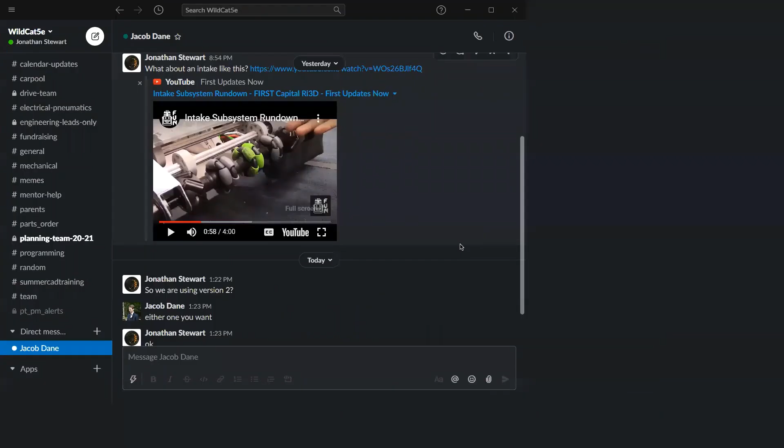All right, I forgot to say this. This is kind of the intake that we're basing it off of. So it's got some mecanum wheels and then 2 omnis and then green. And we've seen this work well in the build season, in the competition season too, not just on that video. So what we're going to do, it's probably the last thing I'm going to do.

I'm going to put these wheels on. I already constrained it, so from there to there. And then you want this offset to be about 2 inches. It's kind of weird. Let's see, so I'm going to see what the constraints are on this by clicking that. There's a mate there and a mate there.

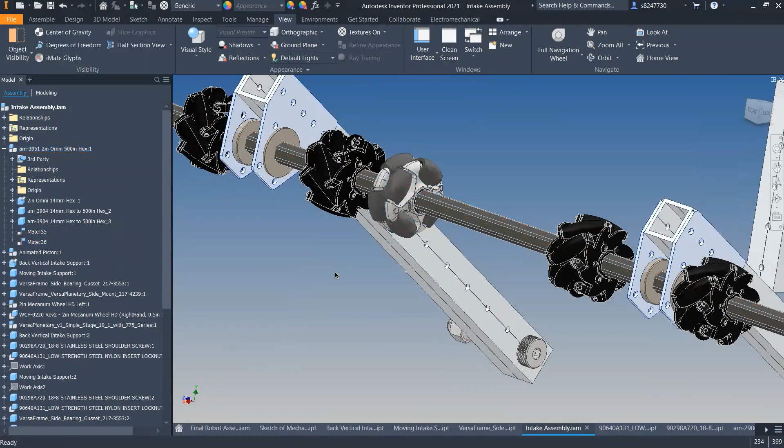So instead of having to deal with this weird constraint, what you can do is just constrain it based on the middle. So I'm going to do a mid plane between this plane and this plane, which is this tiny little plane. Okay. Let's see if they make theirs right. All right. Okay. So I have to make this bigger because I have to be able to see it in the actual assembly. Sorry.

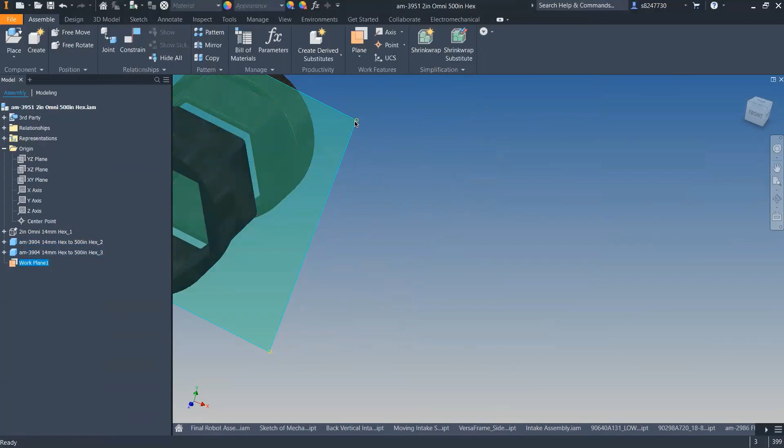If Autodesk can make these little tiny circles slightly bigger, this would be so much easier. Alright. How about I just make an offset plane that's 0 inches? Aha. There we go. Now it's larger. Now we can see it. That's kind of a sketchy way to do it. Okay. So we want our planes to be visible now, so you have to check their visibility.

Oh, it's a big thunder. I don't know if you can hear me. Alright. I don't know. This is weird. Alright.

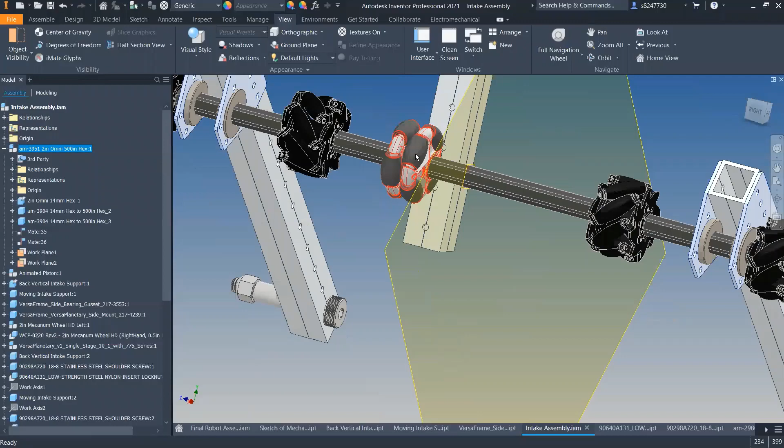What we're going to do is just do all these constraints, because for some reason, this omni wheel is not letting me scoot it back and forth on the x-axis, which is kind of strange. So let's say I want this plane to this plane. Jacob, do you know why it's doing this? No, I'm confused too. So I mean, try putting no constraints on the wheel and just doing the plane first. Yeah, I tried to do it like 4 different ways. Yeah.

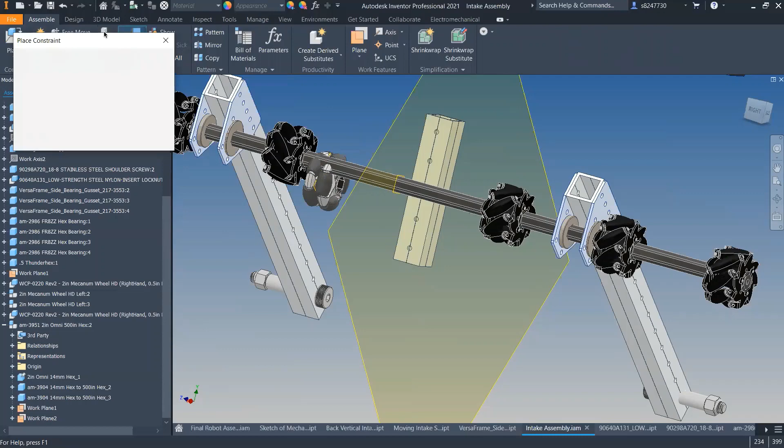Oh no, it's not Autodesk. It's my computer. It's super slow. Let me wait a second. Alright, I don't know what's wrong with my computer. I think it's probably the Wi-Fi or something. It's barely even working. Oh my God, I don't know what's happening. Okay. Let me try it again. I'll just go ahead and save just in case. Yeah, definitely save it right now. What's happening to my computer? There's a large storm and AT&T decided to end my Wi-Fi usage. Okay, well, I guess that's all we're doing for today. Okay, it did save. Yeah, and it's almost time to be over. All right, good thing I got that saved. That was kind of crazy.

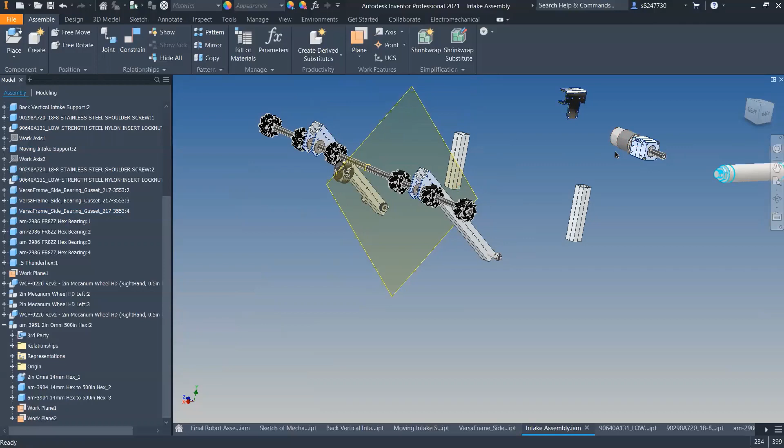All right, so, oh man, this is really laggy. So on Friday, Jake's gonna finish up, put his piston on, put the motor on, do some more omni stuff, and hopefully it actually works. And then we'll be able to put it in our full robot assembly. Wow, I'm surprised it actually loaded that. And then take out this bad intake and put in our new roller bar intake, which will hopefully look better.

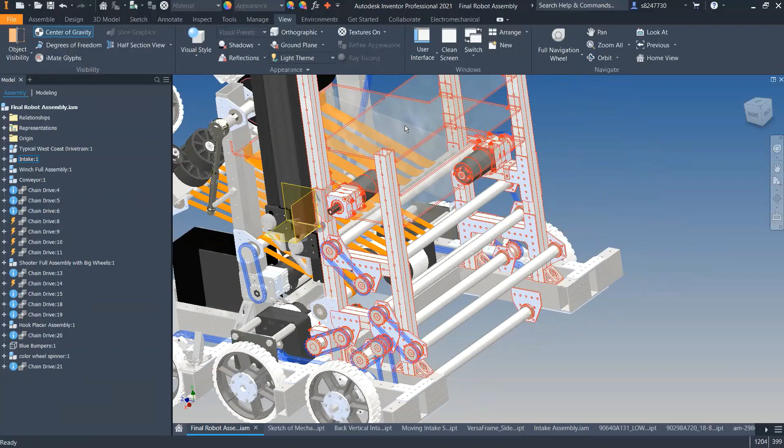Oh, and in the actual build season, we're gonna have to put in some new electrical, because note to future freshmen watching this video, never put your electrical in stacks like this. It's a massive pain. You can't get to anything on the lower stacks, even if you have hinges or whatever. But anyways, all right.